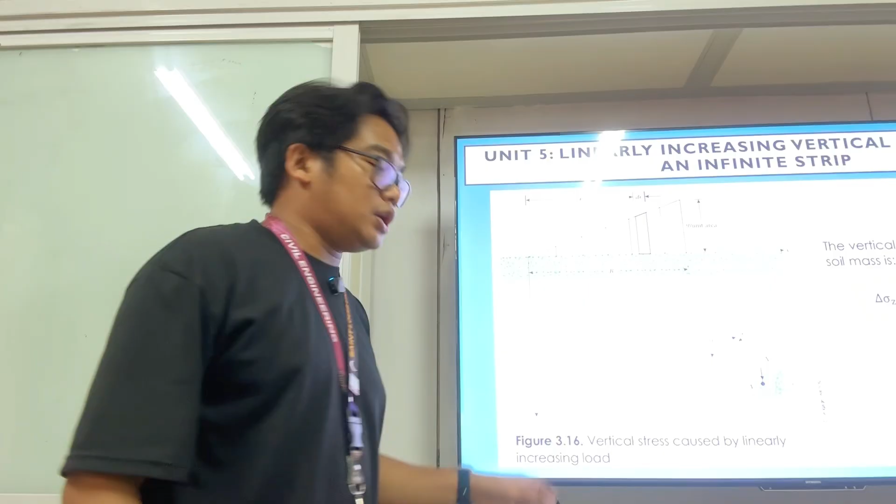So as a stress load on a specific depth Z at a point A, the linearly increasing strip load will now be drawn as a varying load, such that the increase in vertical stress at point A at depth Z will be computed as the stress load Q, in units of kilopascal, over 2 pi times 2x over b, times alpha minus sine 2 delta, where alpha should be written in radians and delta is in degrees.

Now, the important thing here is for us to know how to determine specifically the angle alpha and the angle delta. Again, angle alpha is in radians, or converted to radians, and angle delta should be in degrees. How do we solve for the angle alpha and the angle delta?

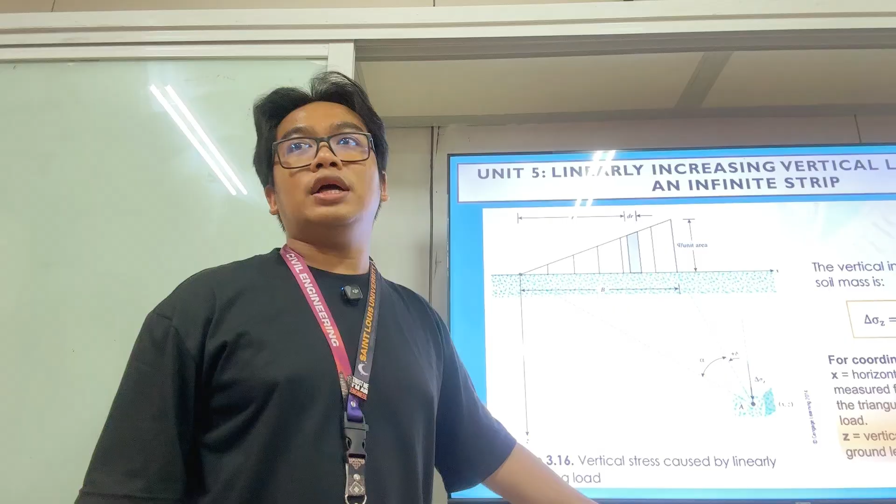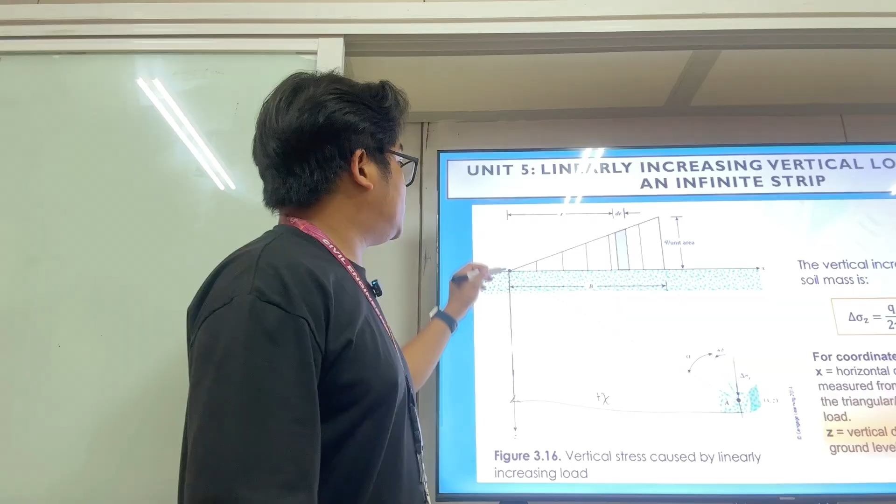The x distance will always be in reference from the 0-degree slope of the varying triangular load, such that x comes from this 0 slope location, considering the positive x direction. But if the location of the point is towards the other direction, the x will be negative. To come up with the value of angle alpha and angle delta, we must always draw a perpendicular line dissecting the location of point A, creating a right triangle.

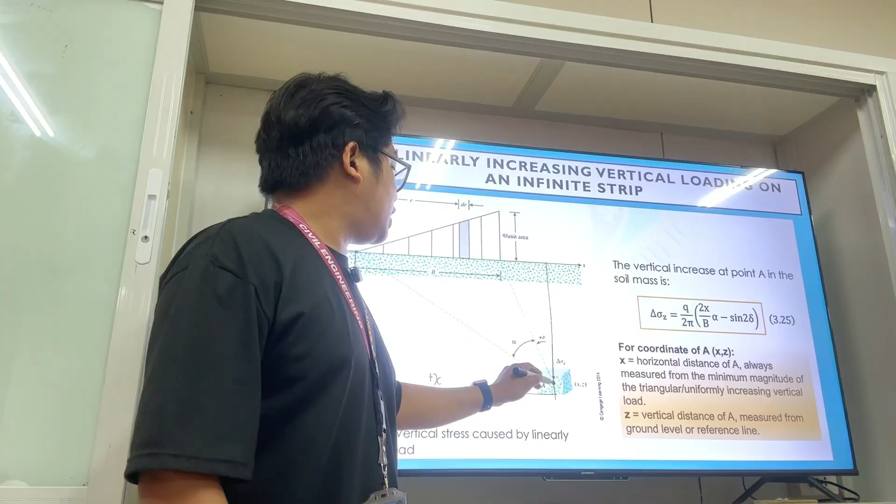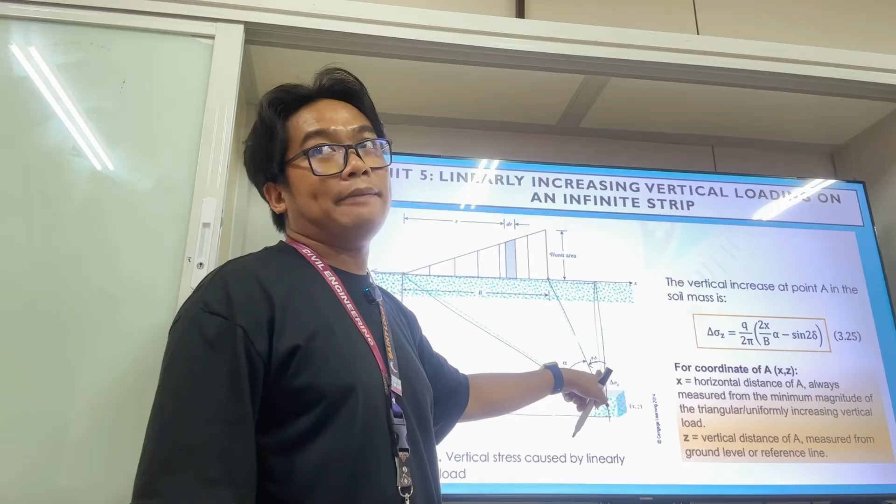The line encompassing the angle alpha is always a vertical line, such that the point where the maximum strip load or maximum slope of the strip load will be your reference to create the angle delta. Then from that maximum slope towards the minimum slope, or the 0 slope location, is the angle pertaining to your angle alpha.

Dapat laging right triangle, hindi pwedeng maging ganito ang magiging alpha ninyo. Nasusundan? Hindi pwedeng maging ganoon.

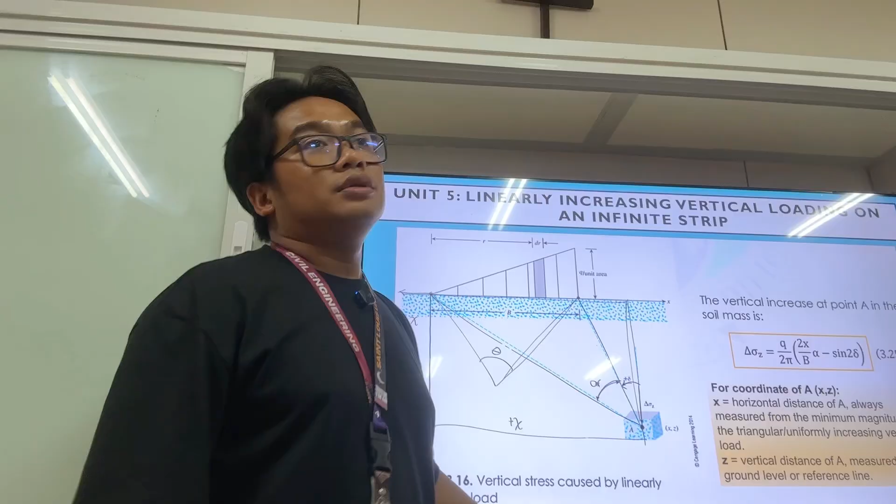Such that the angle delta will always be in reference to a vertical line or a right triangle. The angle alpha will be in reference to this triangle as well as the angle delta. So dissect mo lang yung triangle para ma-solve mo ang alpha at delta.

And again, Z is the vertical distance of point A measured from the ground level or reference line. Now, guidelines for method 1 and method 2.

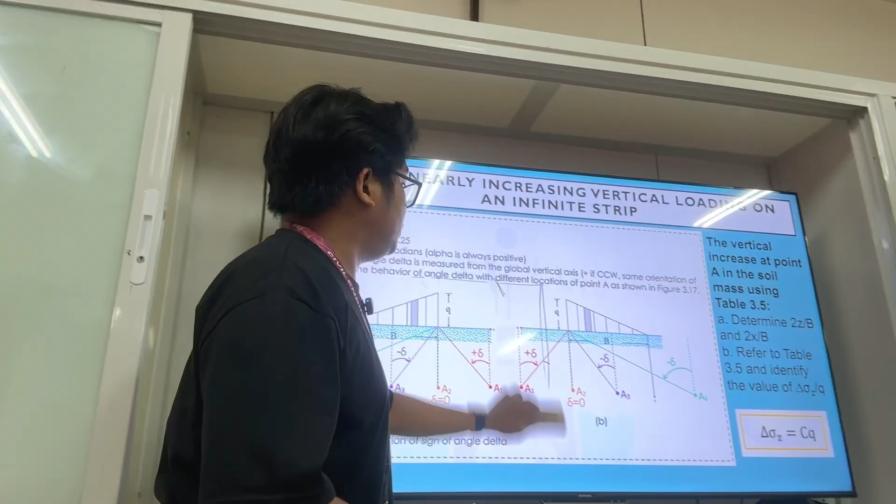Method 1 in solving for the respective alpha and gamma: using the equation we discussed earlier, we convert the alpha into radians, and we retain the gamma as an angular angle, or degrees.

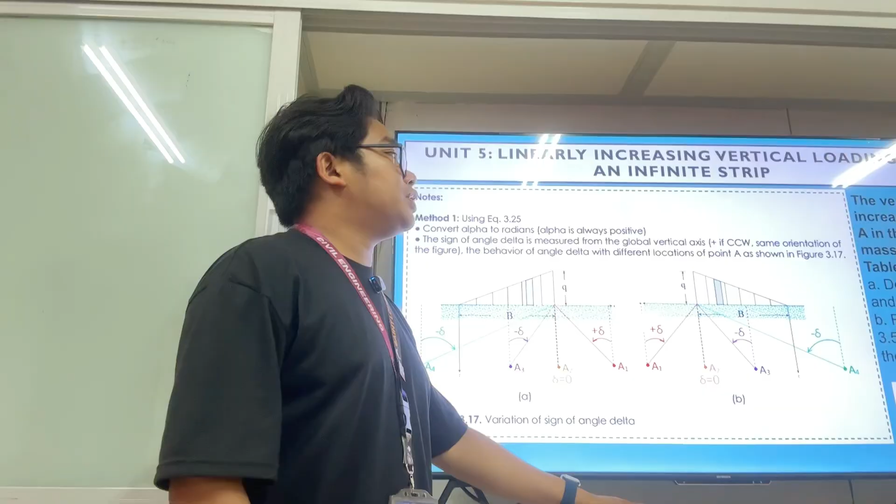The sign of angle delta is measured from the global vertical axis, which is positive if counterclockwise, with the same orientation as shown on the figure. Then the behavior of the angle delta with different locations of point A is as shown here, and the behavior of angle gamma or angle delta follows accordingly.

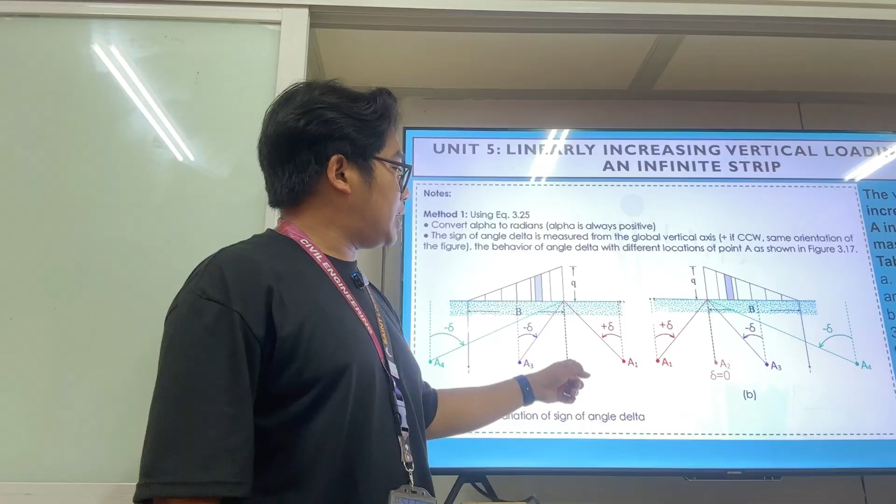So kung nandito directly on the maximum slope, ang ating point A, of course, the gamma is equal to 0. And if it is at the midspan of the varying strip load, the angle gamma becomes negative, kasi sabi natin na counterclockwise ng gamma ay positive, kaya ang clockwise angle reference ng gamma ay negative. Then if A is found here, positive naman ang ating angle gamma, and so on.

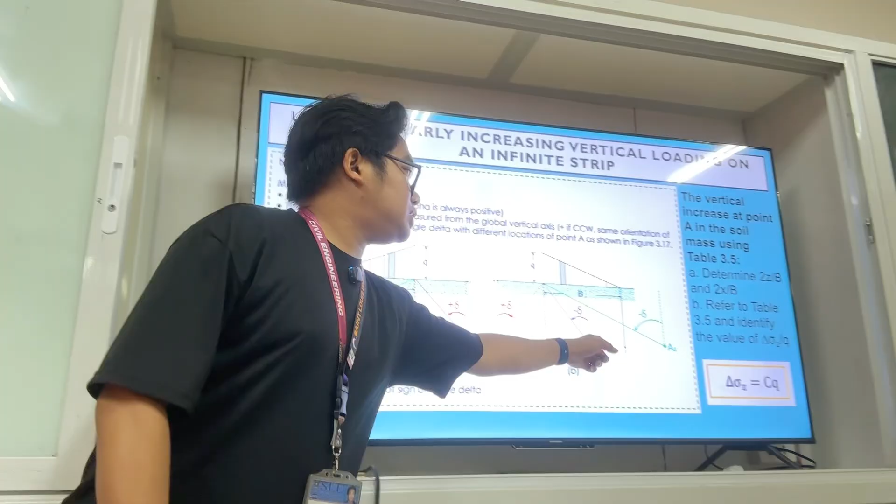Such that if the location of the 0 slope is here, therefore x will be positive towards point A. If the location of the 0 slope is here, therefore the x distance towards point A is negative x. The positive and negative x value is with regards to the use of the table later on.

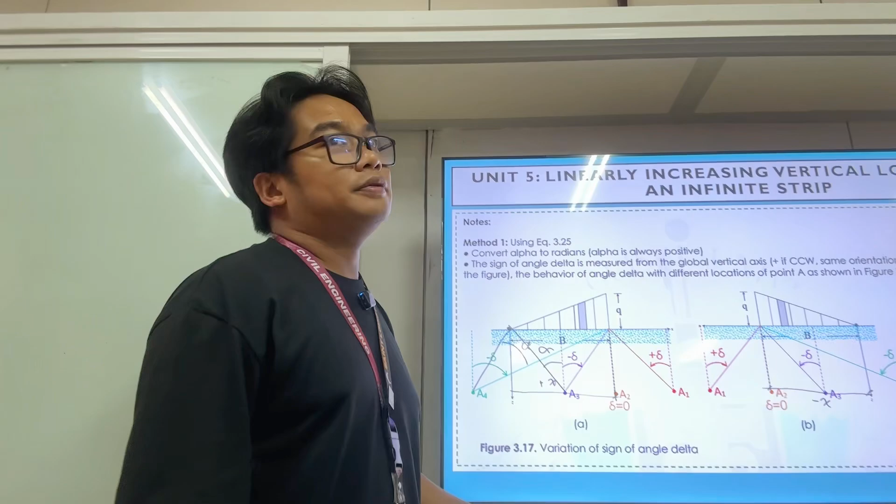Then the location of the alpha: for this case, ito po ang magiging location ng ating alpha. Kung nasa gitna, ito naman ang ating alpha. Then if it is here, the alpha will be here. The alpha is always directed from the angle gamma towards the 0 slope location of the varying strip load.

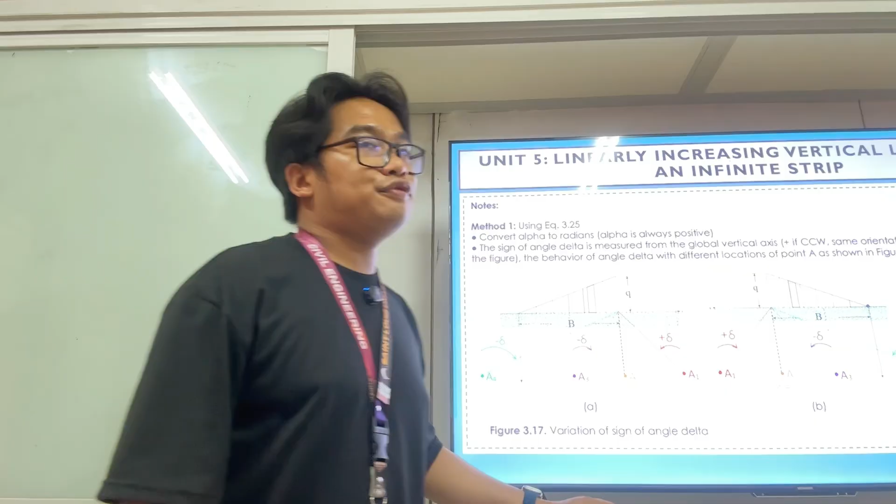Now, the vertical increase at point A in the soil mass using table 3.5 will be determined using the formula of 2z over b and 2x over b, knowing if x is positive or negative in reference to the location of the zero slope. Refer to table 3.5 to determine the increase in vertical stress equal to c. Therefore, delta sigma z is simply c times q using the table.

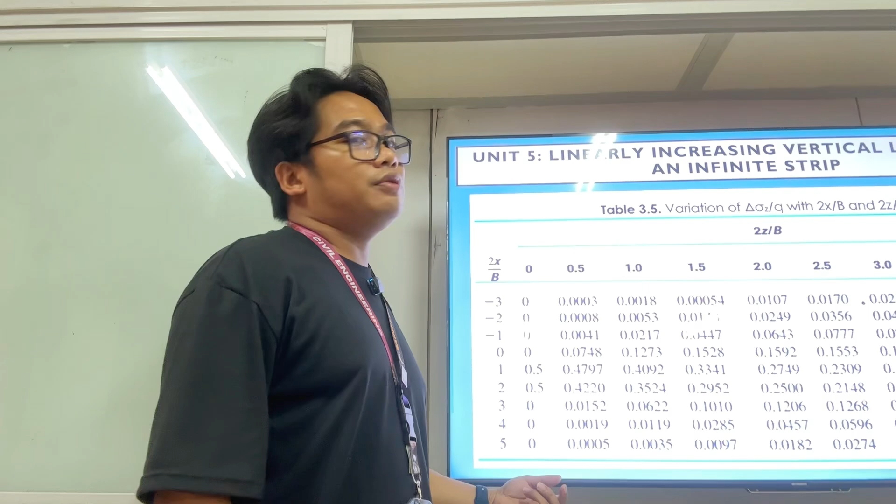There are negative values here. If our x is in reference to the opposite side of the Cartesian plane, meaning x is negative, then for method 2, if the values of 2x over b and 2z over b cannot be found on the table, we must proceed using the exact formula rather than interpolating.

Now consider the orientation based on the diagram. The strip load is always located at the first quadrant, where x is either positive or negative based on its location from the origin of figure 3.18. So it is positive if oriented this way, and negative if our origin is here, with its zero slope at this point.

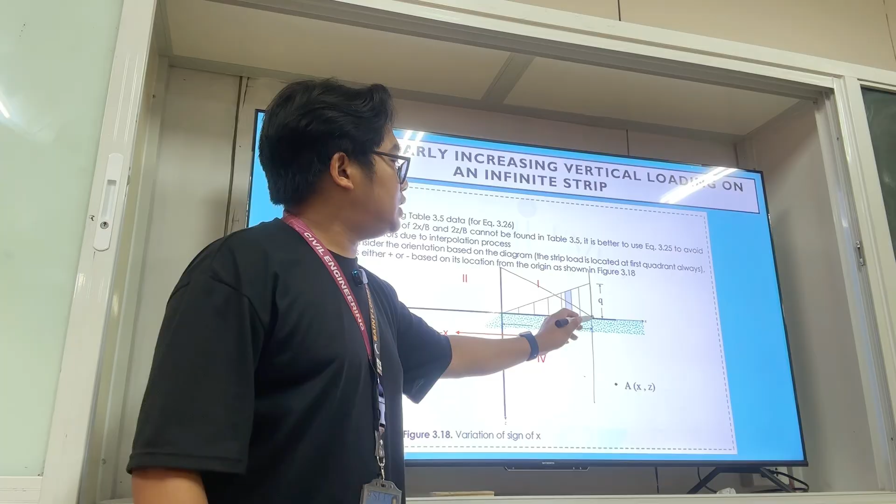So if the origin is here, and the zero slope of the varying increasing strip load is at the origin towards this direction, then the x distance towards a specific point A is equal to negative when using the table. But if we're not using the table as is, the x distance is still towards point A.

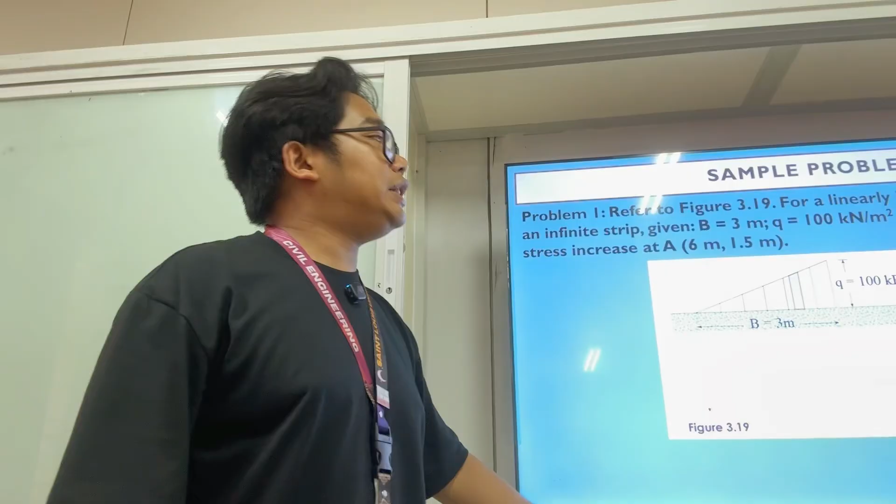Okay, like so, let's try the example. Refer to the figure for a linearly increasing vertical load on an infinite strip given at B equals 3 meters. This is your base of 3 meters, and a Q of 100 kilopascal. We are asked to determine the vertical stress increase at point A.

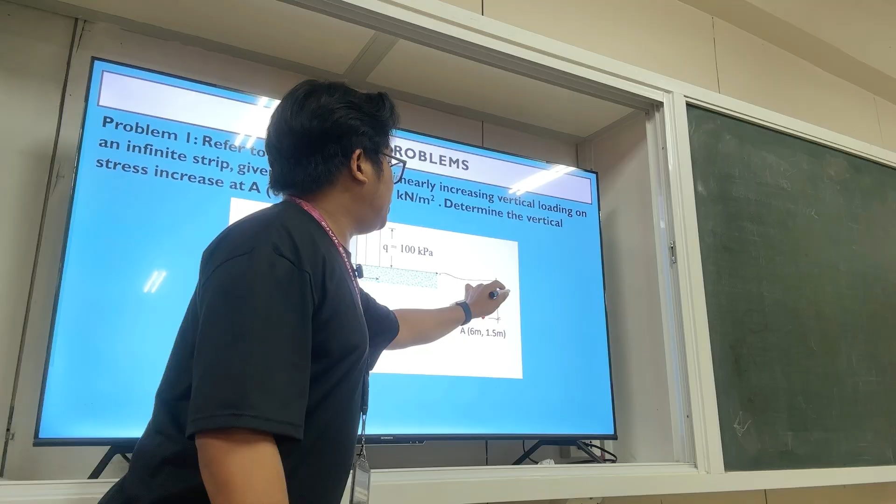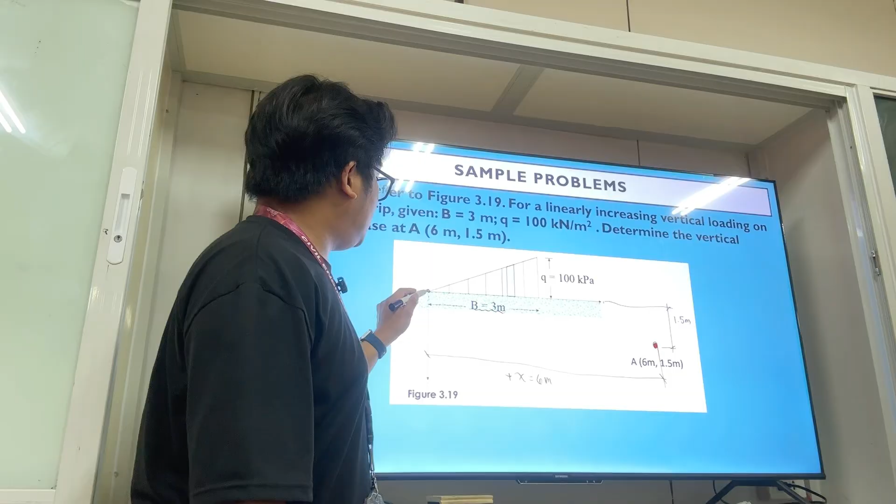Notice point A is at a coordinate of 6 meters and 1.5 meters, meaning the depth z is 1.5 meters, such that point A is offset from the zero slope at a distance of 6 meters. Now, if we were to use the table, is this x positive or negative? Positive, from the origin where the zero slope of the increasing strip load is, positively towards the positive x-axis. That's why our 6 meters is positive.

But if it's on the other side, obviously that will be negative. This will be the location of your point A or your soil mass.

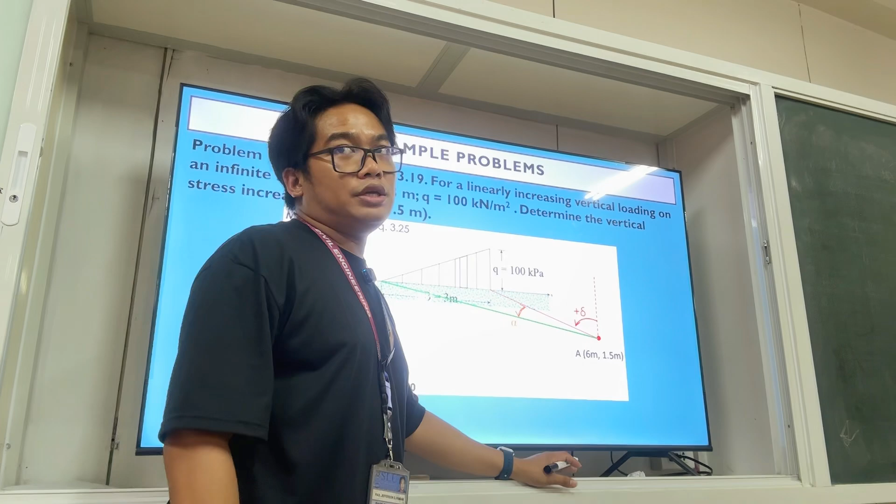Now, first things first, on the formula, determine alpha and delta. From that table, from this figure, we can immediately determine delta and alpha using the triangular diagram or a right triangular diagram. As you can see, this is our alpha, and delta is a positive angle, moving counterclockwise from the global y-axis.

From there, how are we going to solve for delta and alpha? We dissect a triangle. Again, for problem 1, the base is 3 meters, the varying strip load is 100 kilopascal, where z is 1.5 meters and x is noted as positive 6 meters from the origin or the zero slope of the varying strip load. Then, using the location of point A, we derive the two angles, delta and alpha.

Remember, this is the base of the varying strip load of 3 meters, this part. This will serve as your alpha, and this will serve as your positive delta. Since that is 3 meters and the coordinates of A are 6 by 1.5 meters, this distance is also 3 meters. Now, to solve for delta, that's just a simple right triangle, counterclockwise from the global y-axis, positive, 3 meters. What is the depth?

1.5 meters. Can we determine angle delta? Yes, angle delta positive is equal to inverse tangent of 3 over 1.5 meters. So we can determine angle delta as 63.435 degrees. We do not need angle delta in radians, so leave it as is.

Then, for angle alpha, we use this right triangle. Using the right triangle, angle alpha will just be part of the summation of delta plus alpha. So delta plus alpha is equal to inverse tangent of 6 meters over 1.5 meters. Therefore, angle alpha plus delta is equal to 75.96 degrees, but that is for both alpha and delta together.

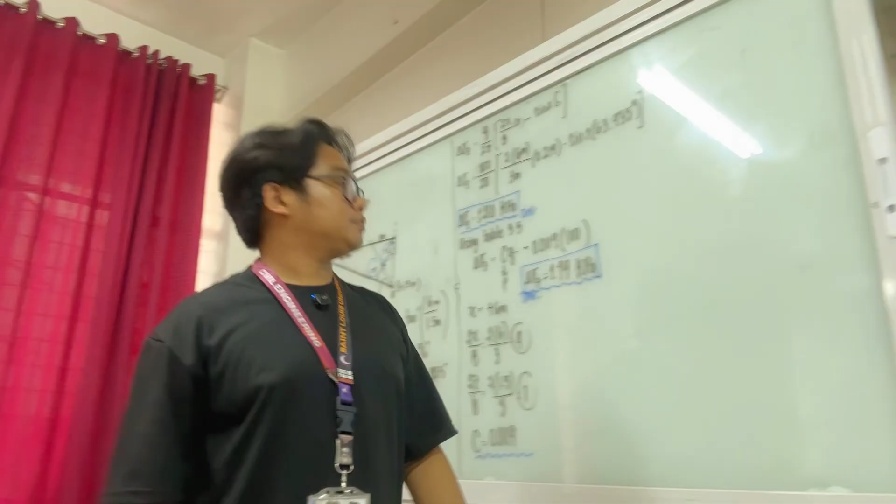Now how about this one? For problem number 2, for a linearly increasing strip load at B, where B is 3 meters, and again Q is 100 kilopascal, again determine the increase in the vertical stress when point A is at the middle of the varyingly increasing vertical strip.

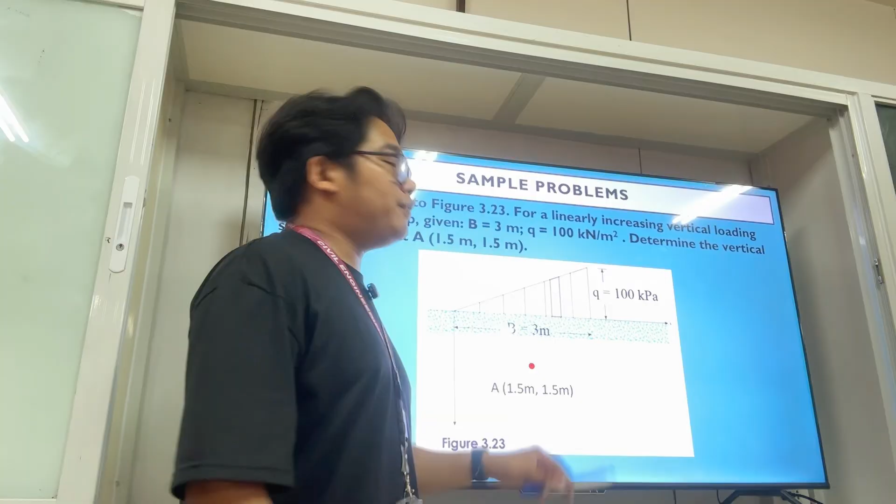What if it's at the middle? For problem number 2, of course if it's at the middle, again vertically upward, then delta will always point towards the maximum slope of the varying load, clockwise. Therefore what will be the delta? Negative delta. Then alpha is always pointed towards the zero slope.

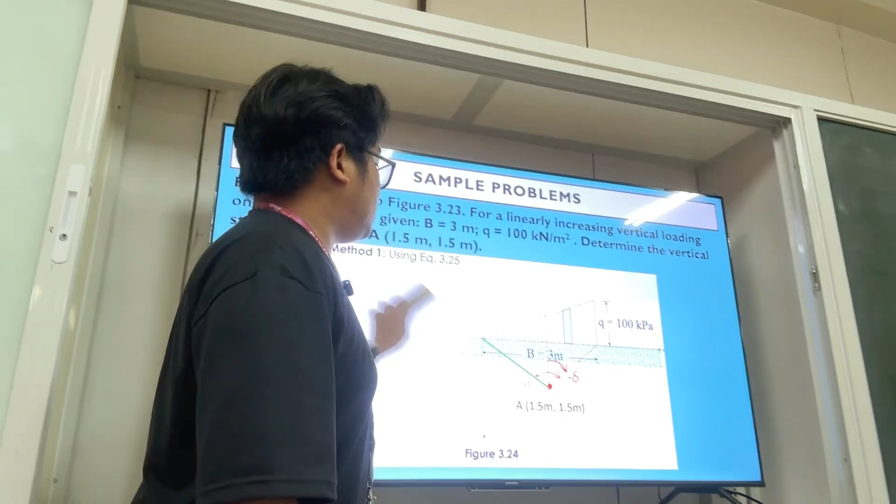So this will be your alpha. Did you follow? Okay, again the angle delta is positive if it is counterclockwise from the global y-axis, and it is negative if it is clockwise from the global y-axis.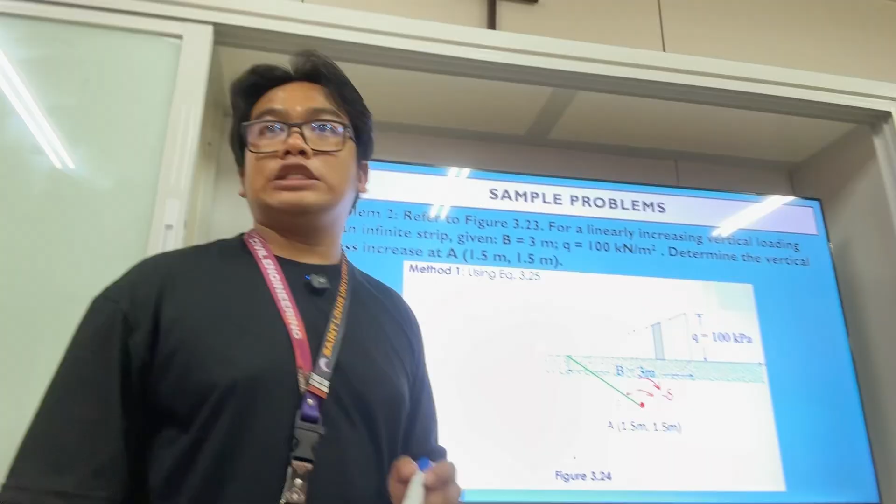Now with this, what will be the value of x? Where should we get the value of x? From point A towards what? Towards the zero slope of the varying load. Okay, which is what? X equal to 1.5 meters.

If we were to use the table, is this 1.5 meters positive or negative? Towards the positive x-axis, so therefore this is positive from the zero slope or the origin, of the imaginary Cartesian plane.

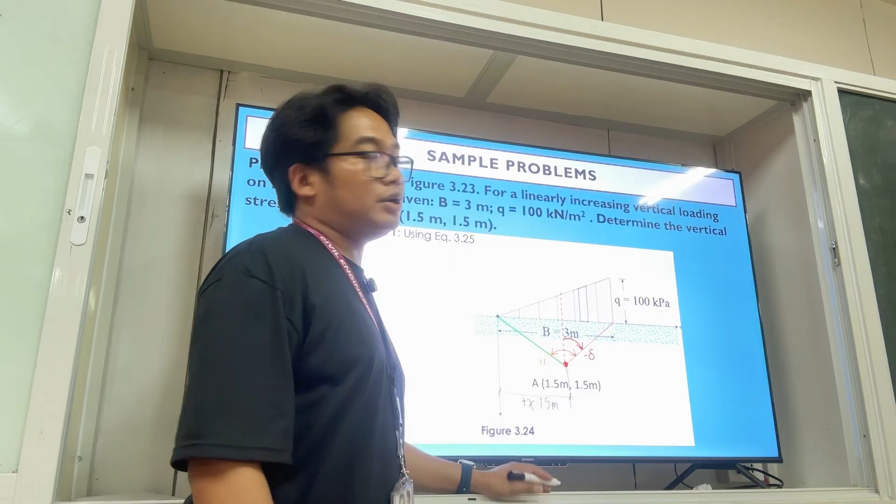Did you follow? But again, here is our zero slope, this will be the origin, and this will be the distance x. What will our x be? Obviously towards the right, this will be positive. Did you follow? Okay, knowing those parameters, we can immediately solve for delta and alpha.

Just two triangles. Again, B is 3 meters, Q is the same as 100 kilopascal. We only need to solve for the new values of alpha and delta.

For the values of alpha and delta, again, at the midspan of the varying strip load, which is 3 meters, this is 1.5, and this is also 1.5 meters. Just two right triangles, so most likely they are the same. Did you follow? Alpha, then negative delta.

Follow please. So what is the value of, again, the depth is at 1.5 by 1.5 meters. So with that, again, alpha is inverse tangent of 1.5 over 1.5 meters, which is what? 45 degrees. This would also serve as the value of delta, except it's negative 45 degrees.

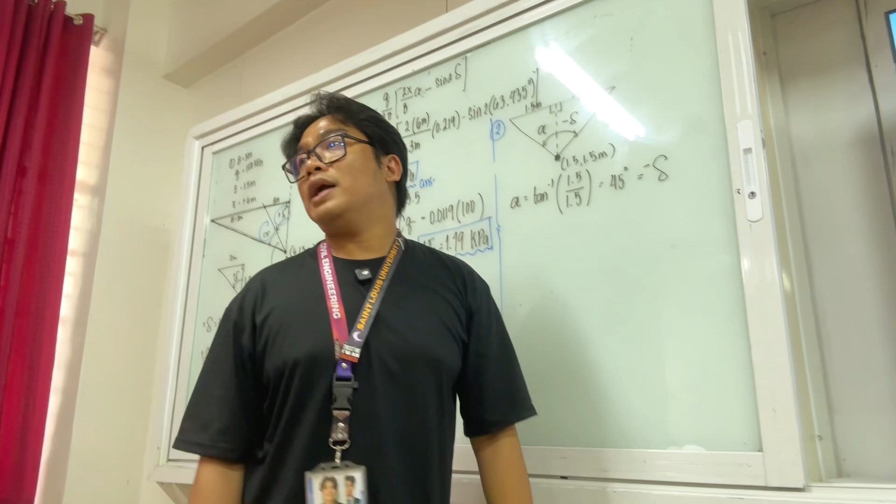But we need alpha in radian, so this will be 45 degrees times pi over 180 degrees. How much is that?

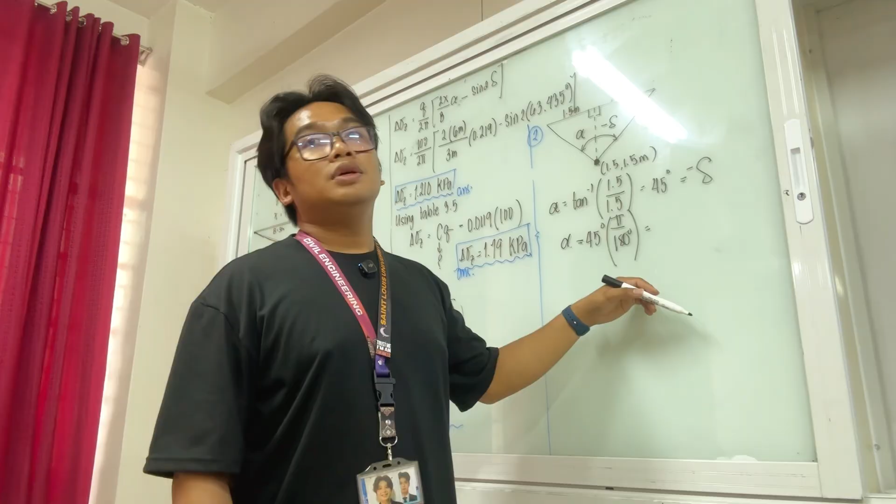0.785. So if alpha is 0.785 and delta is negative 45 degrees, we can immediately solve for the increase in vertical stress. That is again Q 100 over 2 pi times 2 times 1.5 over the base of 3 meters and alpha of 0.785 minus sine 2 times negative 45 degrees. So that, therefore, the increase in vertical stress is equal to

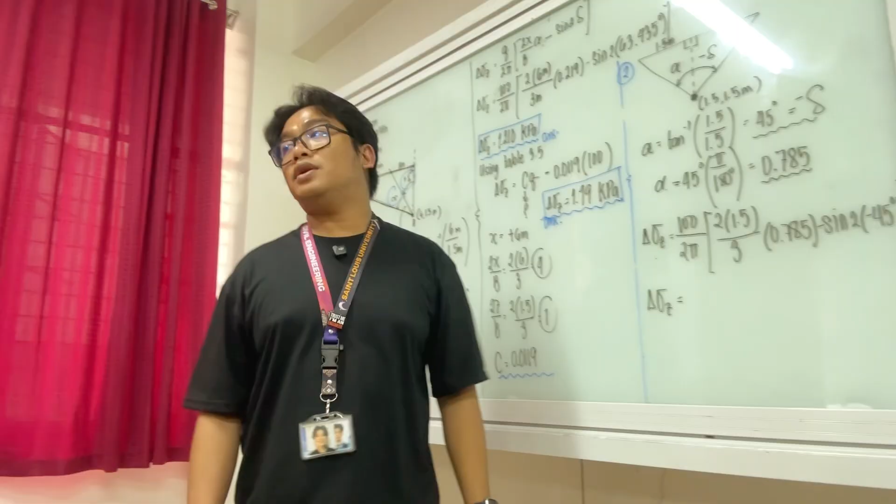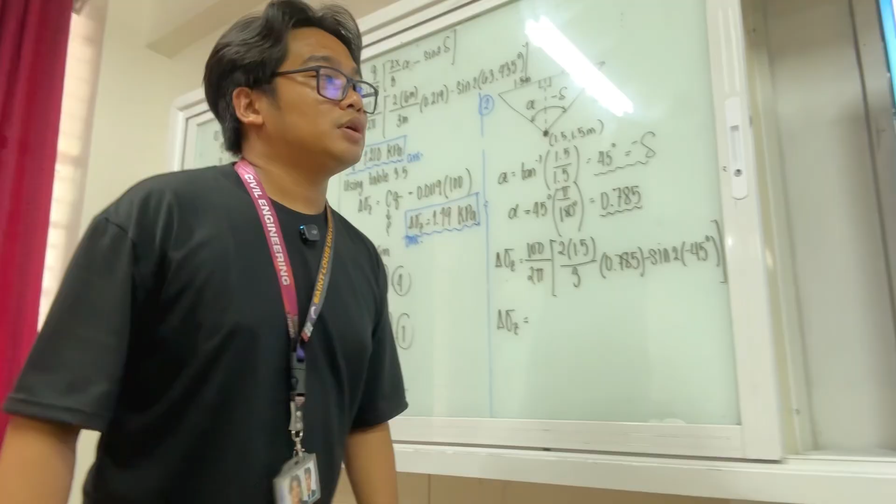Ano? Bakit? Ay, o pala, nanggaling siya sa line ng delta. It will always come from the line of delta.

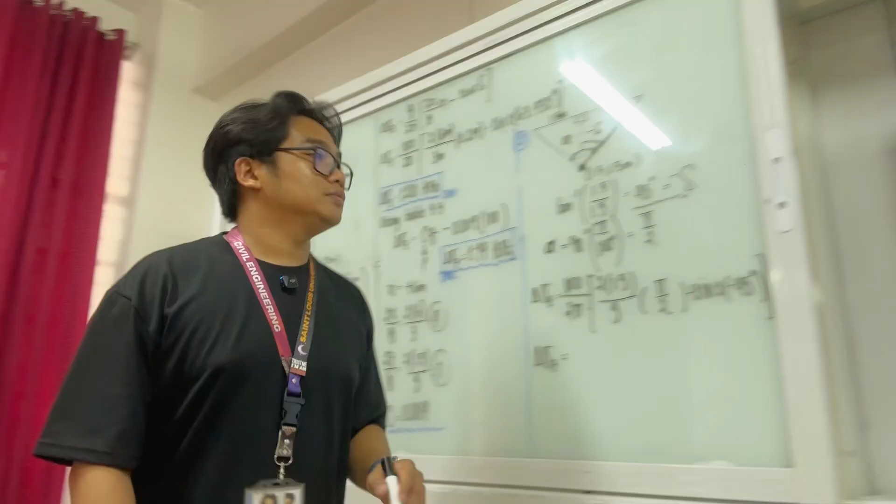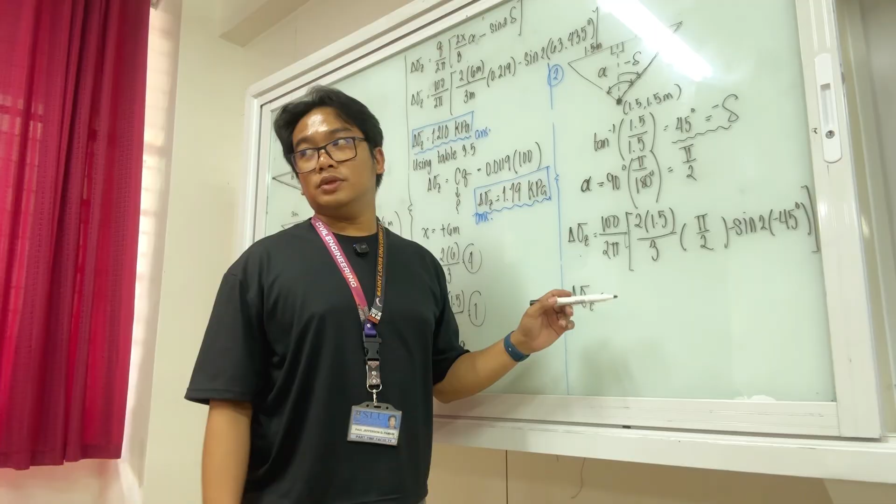Ilan yan? Manggagaling siya lagi sa linya ng gamma. Ilan po ito? 40? 91? 4,091? 40.915. Anong unit? Kilo Pascal. Tama ba? Yes? Okay, nasundan po ito.

Now do the same thing if we were to use the table. So if we were to use the table, again using table 3.5, x is what? What is the value of x for table 3.5? Positive 1.5 meters. So therefore 2 times x, 1.5 over 3 equals to 1. And 2z over b, 2 times 3 over b, that will be 2.

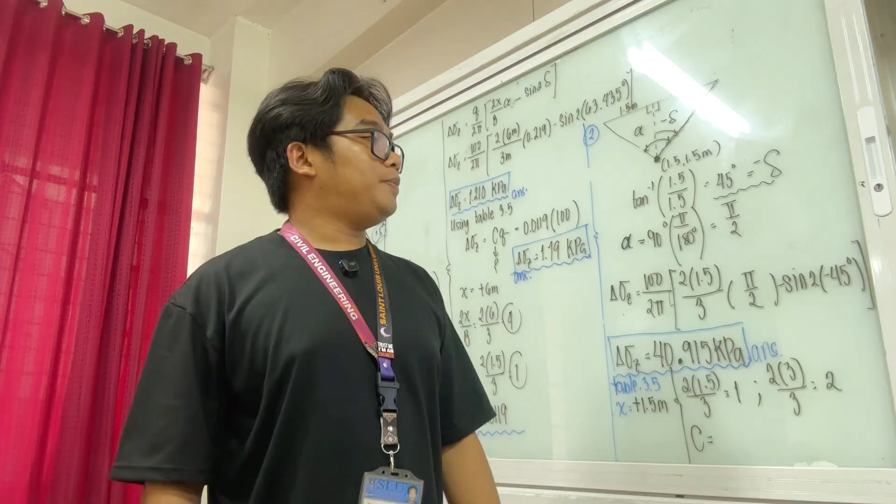Okay, so therefore the value of c, 2z over b is 2, then positive 1. 2 point, z is 1.5, parehas pala dapat siya. So this is also 1. So 1 is to 1, 0.4092.

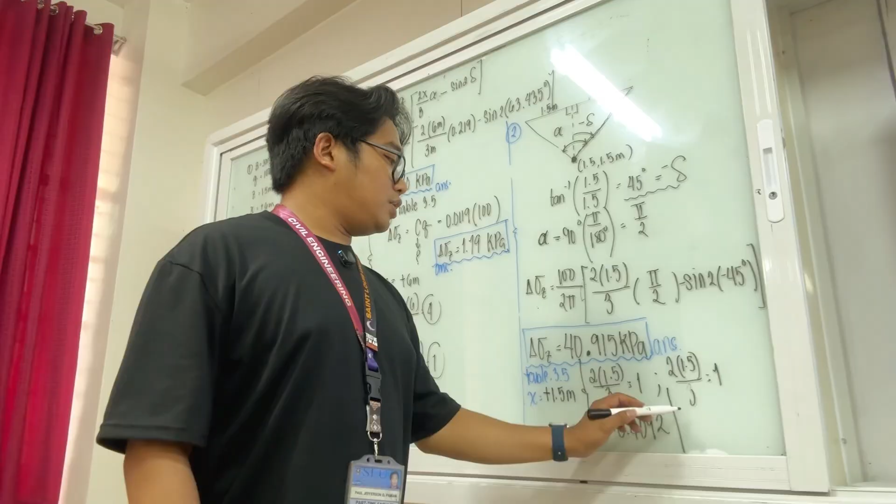Tama ba? Yes. So if that's the case, you can solve for delta sigma z as 0.4092 times 100, 40.92, rounded lang naman siya. Okay, same, nasusundan, tama ba? Nasusundan? Ganyan lang yung varying vertical strip load.

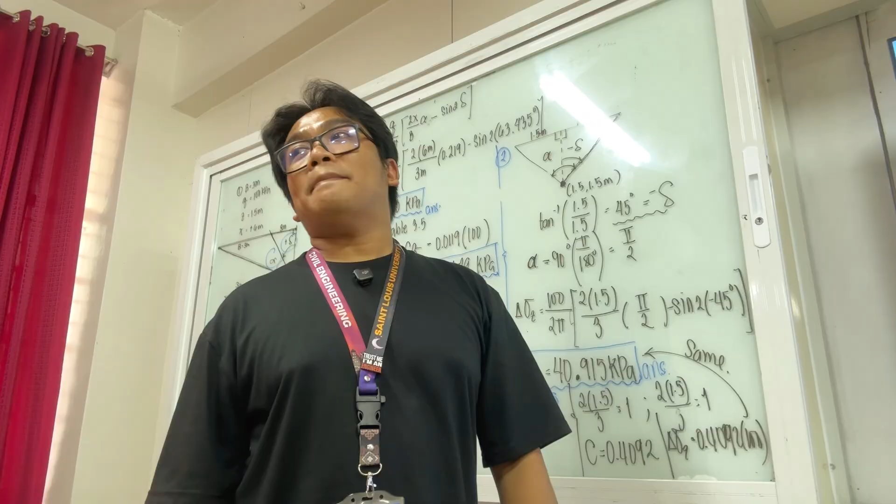Question? Question? Wala? Now how about this one? Ay kasama na nung 3. Assignment pa pala yan, oo, kasama nung last. So 5 problems na yon. Monday, Monday, para seatwork sa Monday. Hey no, we will have a seatwork by Monday. Seatwork nga ni, so open notes.

Okay, now for instance, what if, para madagdagan na lang natin, what if the varying load is oriented in this manner? Varying load is oriented in this manner. Of course this will serve as the origin and the location of the zero slope. And if that's the case, nandito yung ating point A. How will you draw the location of delta and angle alpha? Again, we draw a vertical line perpendicular.

Then this will be the location of your delta, positive or negative angle. Counterclockwise, so positive delta. Then this will be the location of your angle alpha from the angle delta. Susundan. So this will be your angle alpha. Yes? Now what will be the sign for the x distance from the zero slope? X will be a negative value.

If we were to use the table, no? Paggagamit tayo ng table, masusundan. That is, paggagamit lang ng table. Sundin pa rin yung positive value ng x kung gagamit tayo ng formula. Masusundan.

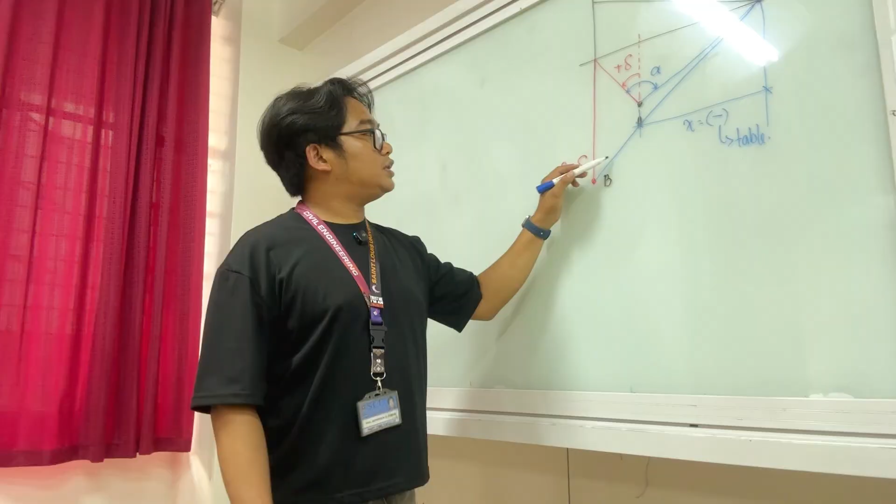Masusundan to? Yes? Okay. In addition, what if point A is here? Let's just say point B na to. Point B is here. What will be the delta? Yung delta natin will be 0. Okay, then what will be the alpha? That's just the angle with respect to a right triangle. Ito yung magiging alpha na natin. Nasusundan? Nasusundan po. Malinaw ha?

Eh baliktad nga lang kasi ito na ng strip load. Paano kung yung point natin is here? Let's just say point C. Baliktarin lang natin ulit. Then this will be your delta. Positive, negative. Negative, clockwise towards the line pointing the maximum slope. Then for the alpha, from the line of the maximum slope towards the zero slope, this will be your alpha.

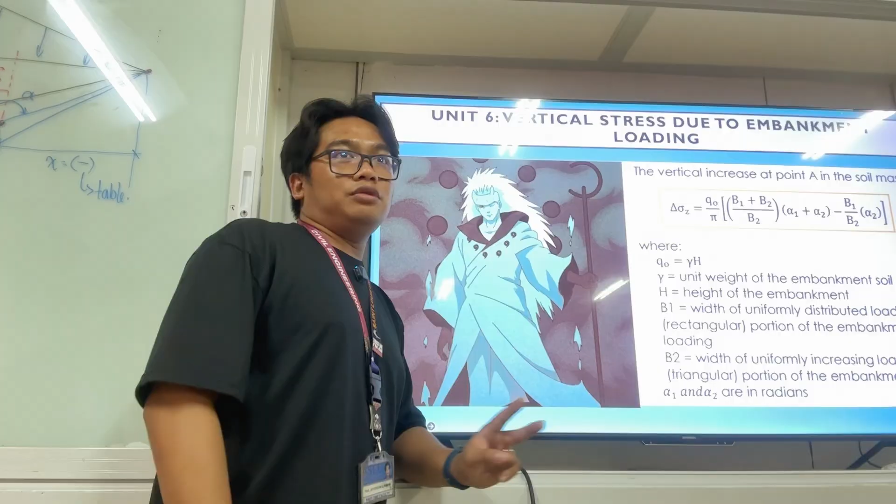Nasusundan? Yes? Okay. Dagdag ko, 5 problem na yun. Simula nung prelim, 1, 2, 3, 4, 5. Unit 1 to 5. For Unit 6, so for Unit 6 naman, pagsamahin natin yung Unit 4 and Unit 5.

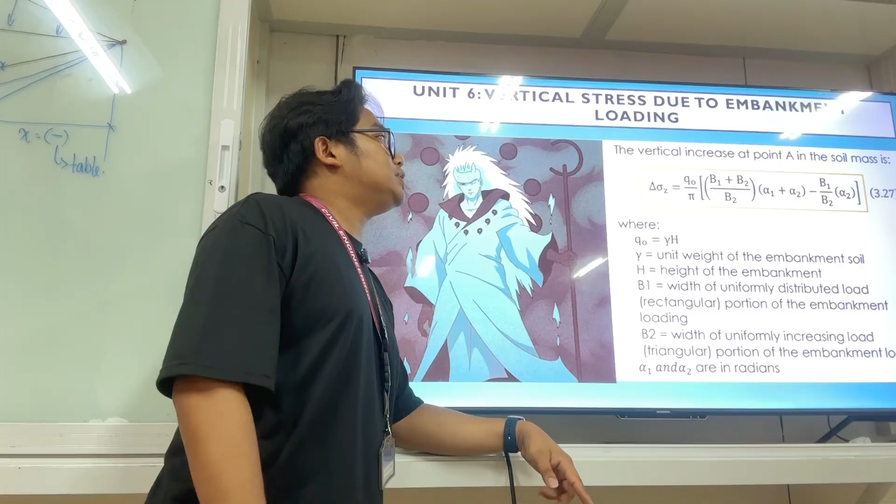Vertical strip load and varyingly increasing vertical strip load. Okay, uniform strip load at saka yung varying strip load on a soil mass. Now, the vertical stress due to the embankment loading. Embankment loading is pretty much the application talks about the embankment of soil on road projects, which is yung wing wall sa ilalim ng bridge, or yung embankment na soil, tawag na dito, cut and fill pagdating sa soil. Okay, now the vertical increase at point A in the soil mass will then be computed as such.

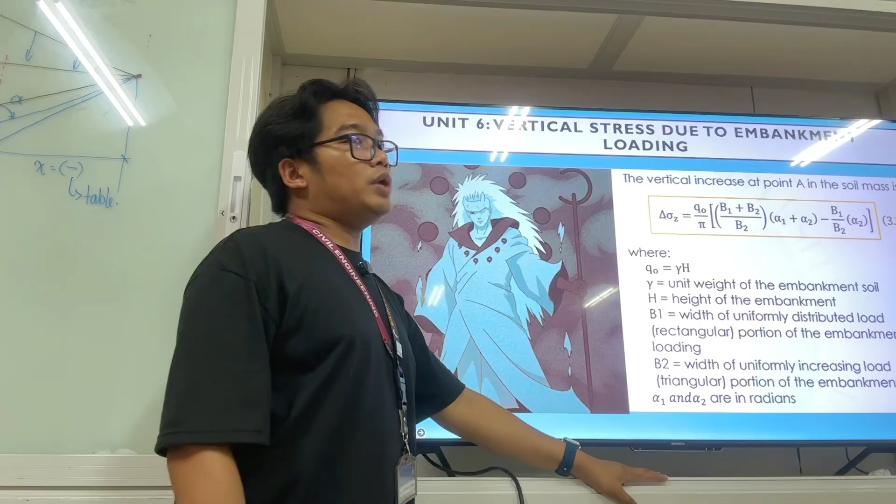Where Q0 is just the product of the unit weight of soil times the height of the embankment, H, over pi times B1 plus B2, all over B2 times alpha 1 plus alpha 2 minus B1 over B2 times alpha 2. That will be our equation.

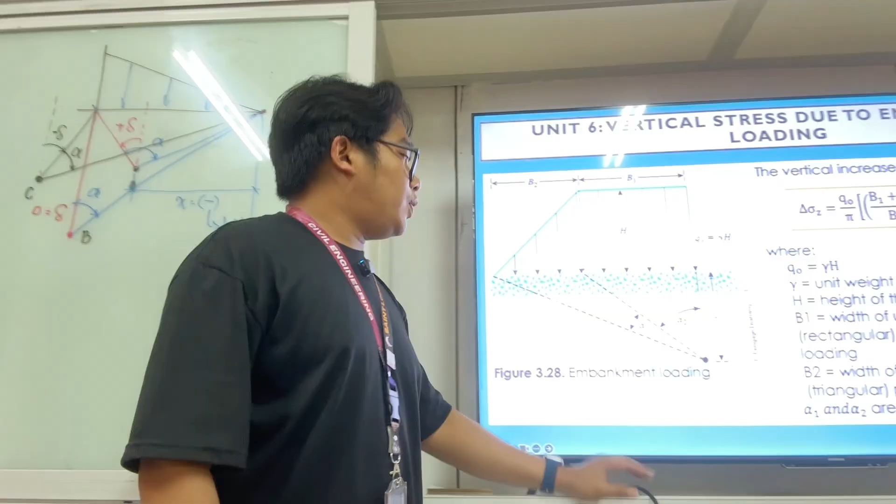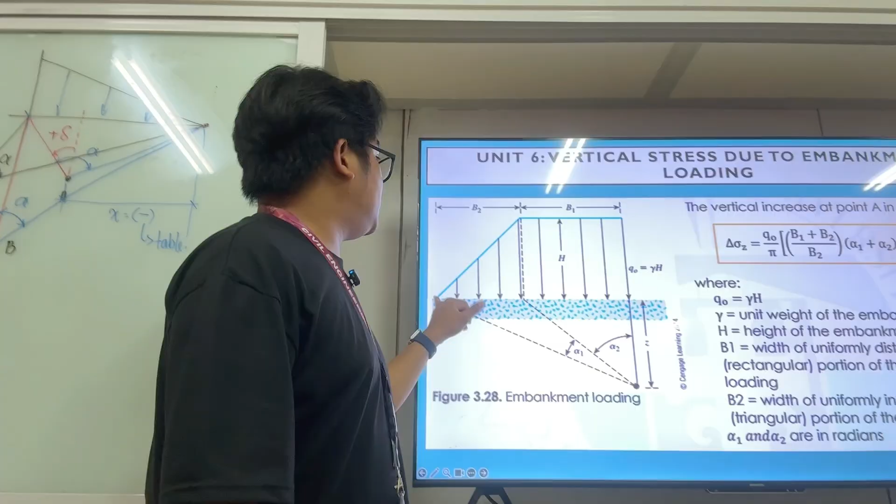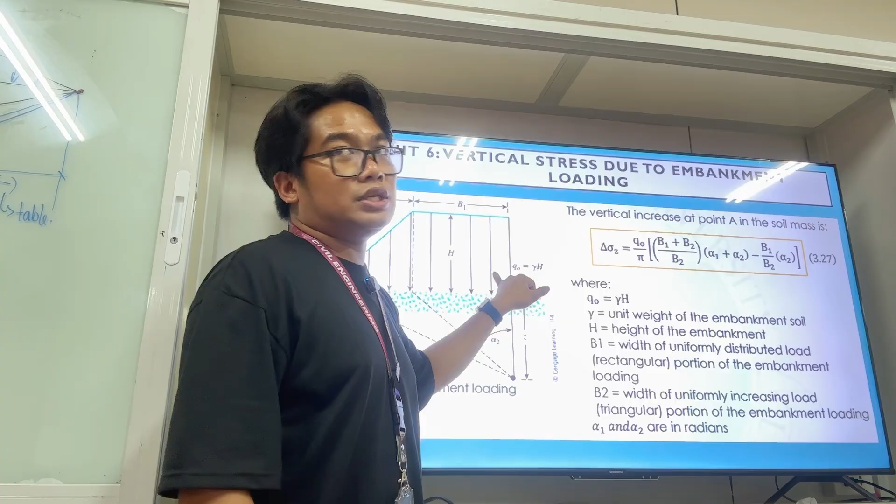When point A is located at this point, at the depth of Z, this vertical line creates an angle towards the base of B1, giving us angle 2. That is our B1. Then, from angle 2 towards the zero slope of the varying strip load is your angle 1, but the base will be B2. Then, the height of the trapezoidal strip load is just the additional stress load on top of the soil, which is just the unit weight of the embanked soil times the height, gamma H.

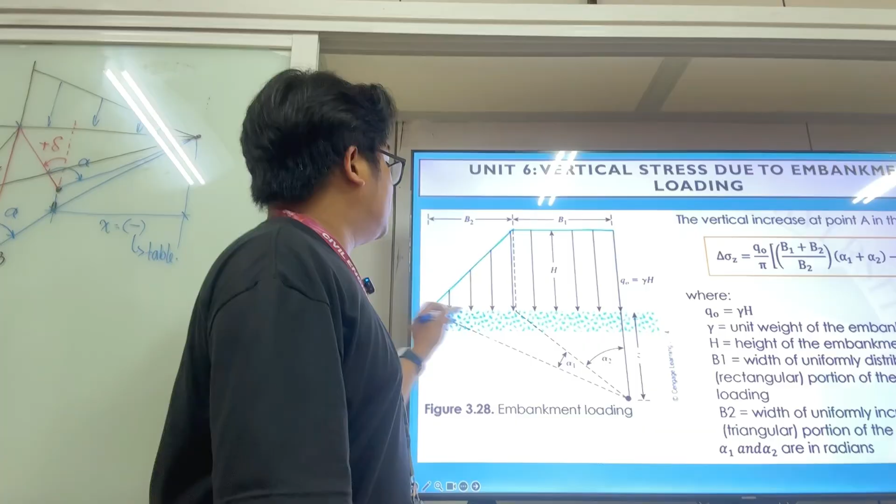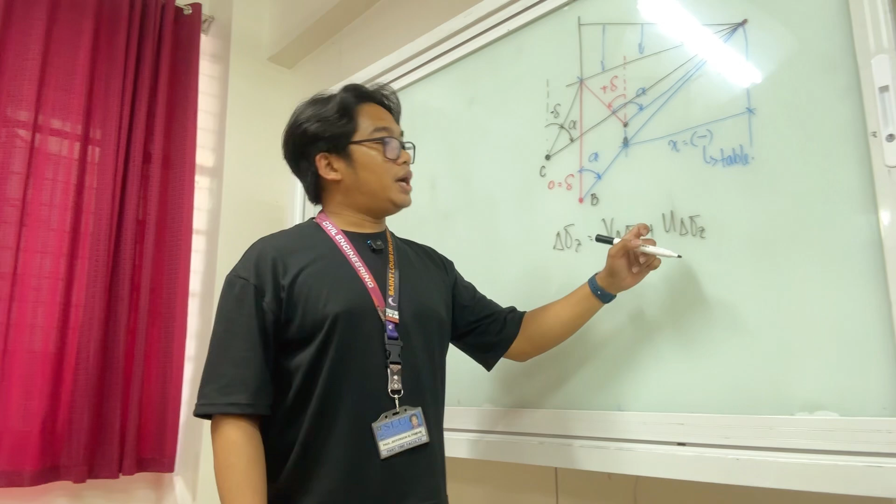But technically speaking, this is just combining two types of strip load: the rectangular or uniform strip load, and the varying strip load. So our delta sigma z is just the summation of the varying delta sigma z plus the uniform strip load. He simplified it into a shorter formula, combining the formula of the varying plus the formula of the uniform strip load, the longer one, the last one. When x is greater than b over 2 and x is less than b over 2, we add pi, then the other one remains.

Conditions in solving for the alpha angles. With method 1, through the use of the formula using vertical stress due to the embankment, always follow the diagram of the loading for alpha 2, where alpha 2 is always measured from the global vertical axis, just like what we did with the varying load.

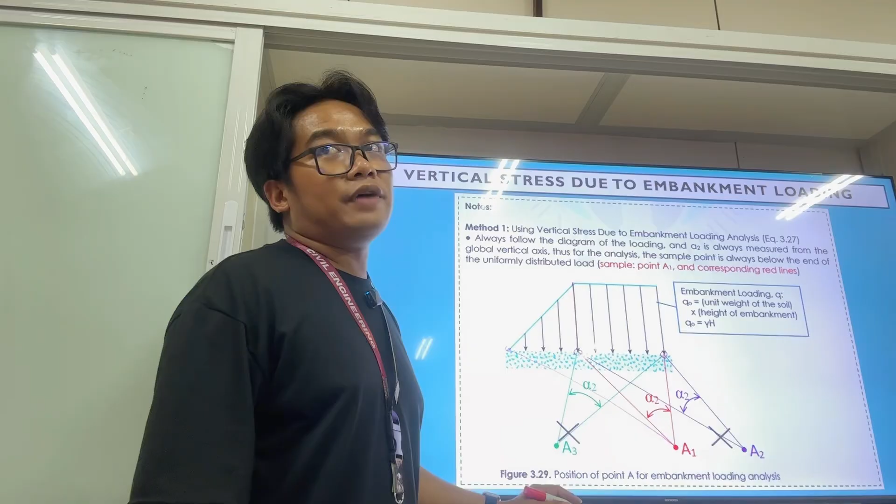From the maximum slope towards the maximum slope of the varying or trapezoidal load, that will be your alpha 2. Then, from the line of alpha 2 towards the zero slope of the varying strip load is your alpha 1. This one will be your B1, and this distance will be your B2. That is if we were to use the formula. Can you see the difference? Of course, it can be confusing, always vertically towards this.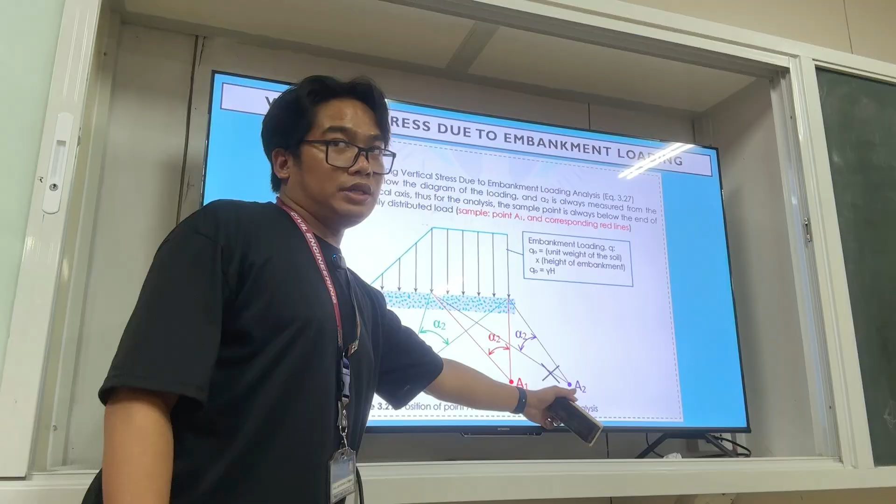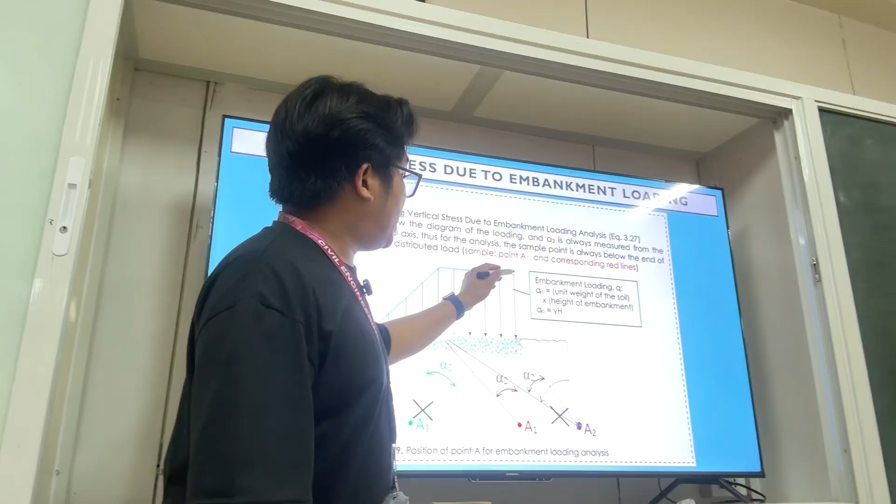What if this is our point A? How will you get alpha 2? Now, how are we going to get alpha 2? The angle from this point towards this point. But how about this, sir? There's nothing here. Minus the strip load here. We have that example as well.

Again, technically speaking, the combined or trapezoidal strip load is just a combination of the varying plus the uniform vertical strip load. As I said earlier, it's just the summation of the increase in vertical stress due to varying and uniform loads. What if you have an embankment section such as this one?

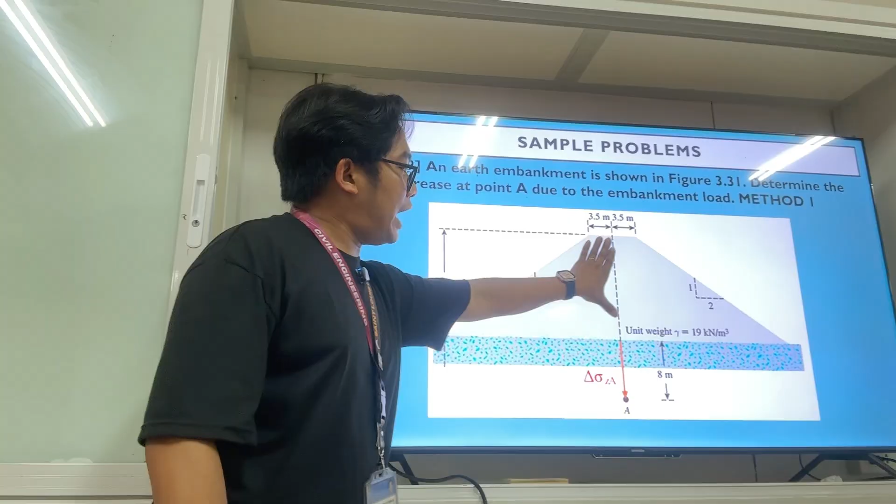An earth embankment is shown in figure 3.31. We're asked to determine the stress increase at point A due to the embankment load using method 1, where point A is at the middle of the trapezoidal section. You can already imagine the solution. Since it's at the middle, we can divide it into two equal parts, where the stress caused by half of the section is the same as the other half. So might as well just solve one side, then multiply by 2.

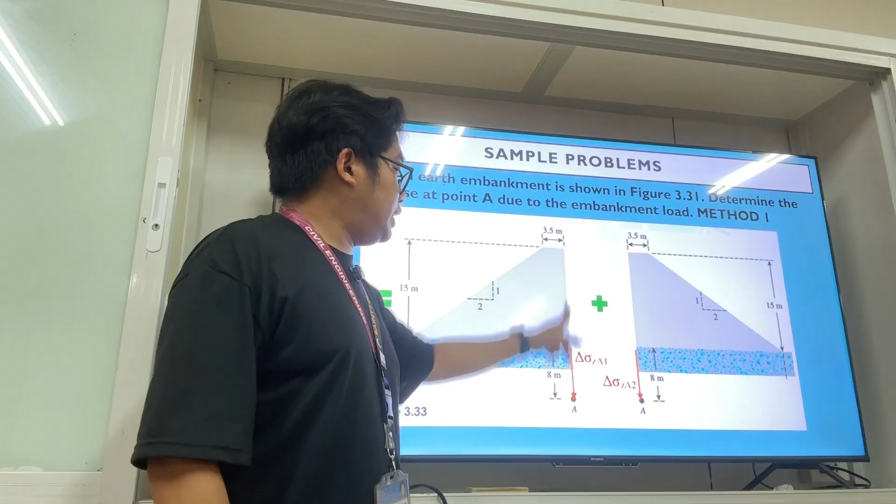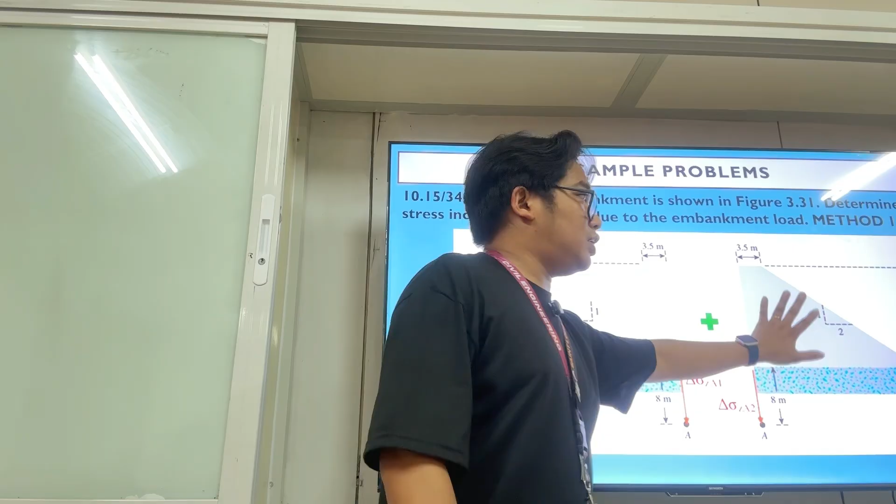Technically, that's just the stress of this plus the stress of this, but since they're both the same, you just multiply by 2. This is just two trapezoidal strip loads with a rectangle and a varying strip load. This is the location of point A vertically at this point. No need to analyze both sections since they have the same load, so might as well just solve for the alpha 1 and alpha 2 of one side only, since they're the same on both sides.

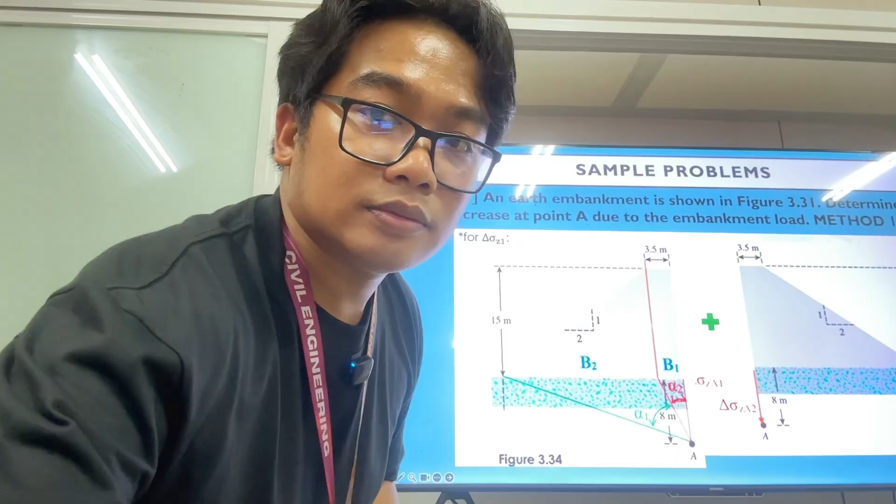Now, considering one side only, this will be your B1, B2, alpha 2, and alpha 1. Using the diagram, we can solve for B1, B2, alpha 1, and alpha 2. So for this problem, again, our alpha 1 and alpha 2.

This is your B1, B2, alpha 2, alpha 1, and alpha 2. The depth of point A is at 8 meters. We know that B1 is at the middle of the rectangular flat surface or flat section of the embankment, which is 3.5 meters. The slope of the embankment is 1:2. The height of the embankment is 15 meters.

So if that's the case, B2 is to 15 meters equal now to 2:1. Therefore, B2 is equal to 30 meters.

Then we solve for alpha 2 and alpha 1. Alpha 2 using this right triangle is just inverse tangent of 3.5 over 8 meters, which gives 23.629 degrees, or in radian, 0.412.

For alpha 1, we can use the whole right triangle, which is just the sum of alpha 1 plus alpha 2 equal to the inverse tangent of 30 meters plus 3.5 is to 8 meters, which gives 76.569 degrees. Then, alpha 1 is 76.569 minus alpha 2 of 23.629.

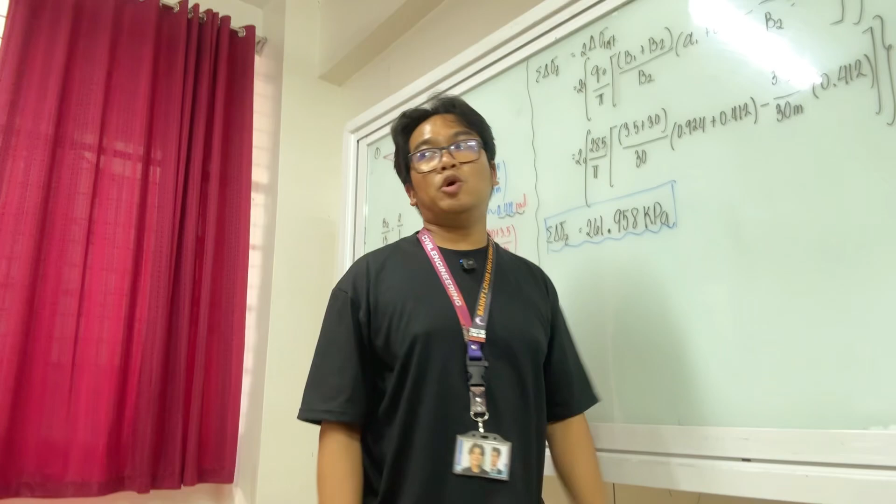That's it for that. That is for method 1. Now, how about for method 2, determining the stress of the same point, point A? Using method 2, we can divide this into 3 sections: a triangle, a varying load, a uniform load, and another varying load. That's just the summation of the 3 loads subjected towards point A.

With that, you again have values of delta and alpha for the triangular load. But take note, this load is the same as this load. The stress caused by this varying load is the same as this one. So, times 2 for this, then plus this, using the long formula. They're the same.

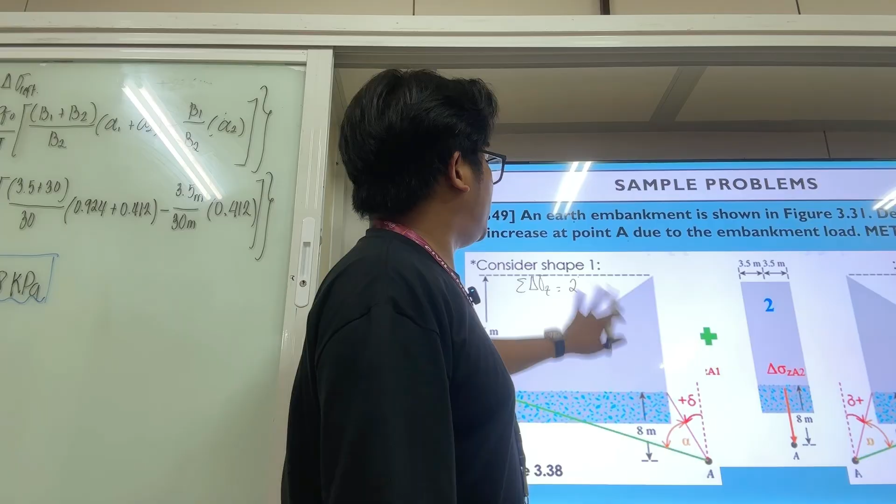It should be negative since it's clockwise. But since they are just the same, you don't have to worry about this one. Just make sure that in your formulation, the summation of increase in vertical stress is: 2 times the triangular or varying increase in vertical stress, plus the uniform increase in vertical stress.

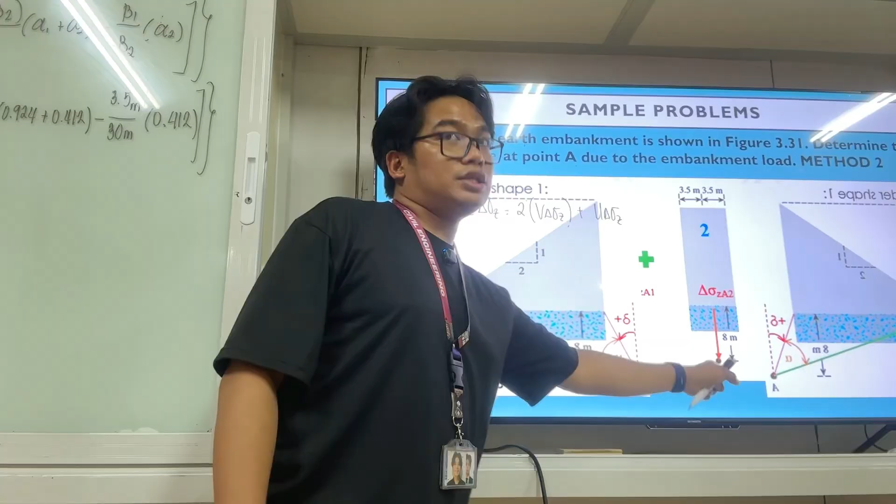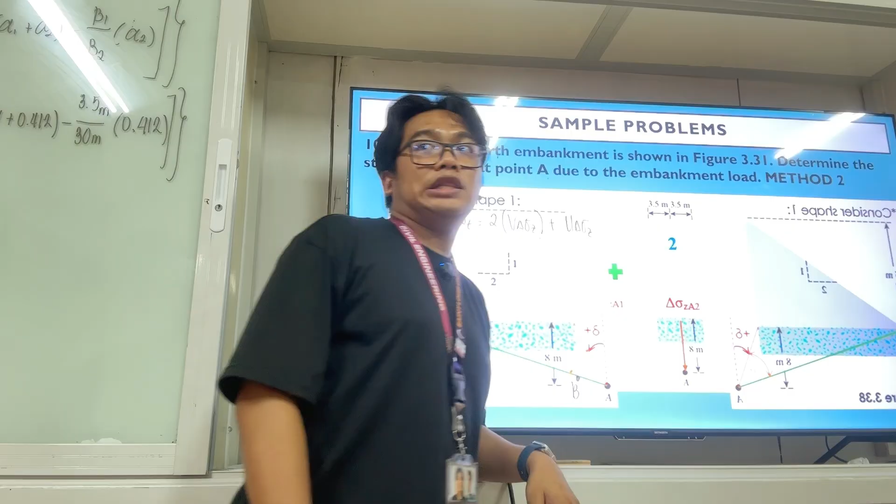The times 2 is because they have the same amount of load, and the point is at the middle. What about earlier, when the point was at point B? If point B is here, that's just the summation of the varying and the trapezoid formula. But what if the point is at the edge? We'll make an imaginary triangular load. We'll do that next week.